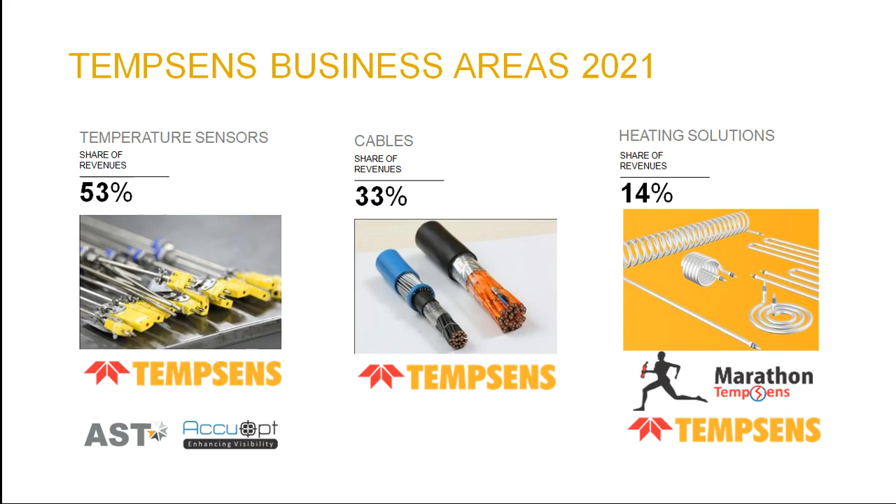This is Tempsens' business area, what we are doing. The three things we do are temperature sensors, around 53%, cable, around 33%, and heating solutions, around 14%.

Tempsens is headquartered in India, with plants also in Hennef, Germany and Jakarta, Indonesia. We serve around 6,500 customers in over 75 countries. We are growing at a fast pace of around 25% per annum, with sales over 180 crore, and we are planning to reach around 400 crore in 21-22. We have already filed 6 patents in 2018, and we file 5 patents every year.

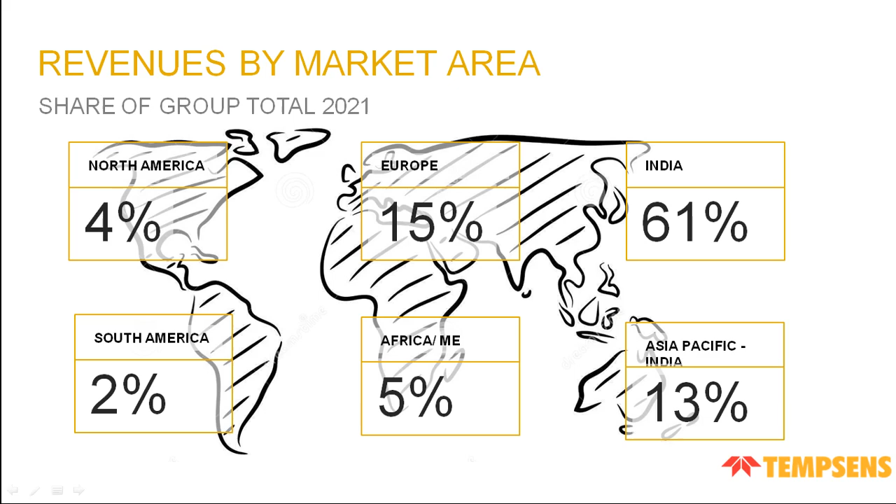This is the revenue by market. We have a strong base in India, Germany and Indonesia, and we are also expanding in other areas. We have planned to set up in the Middle East and also in the USA. So basically, this is Tempsens.

So who we are: our core is performance, and our products and services help our customers fulfill and even exceed their productivity and performance expectations. We are a close partner having long-term relationships with customers, employees, shareholders and vendors. What we do is provide solutions in the field of thermal and cable, offering industry-leading innovative solutions.

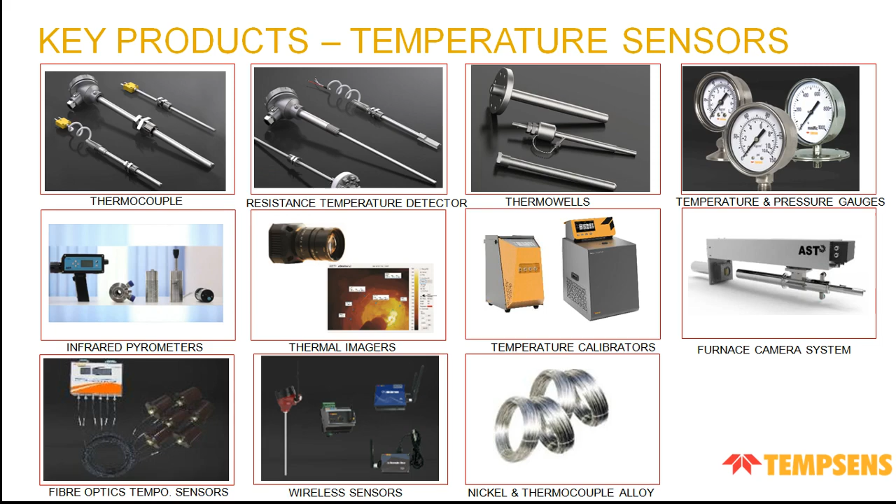These are our key products in temperature sensors: thermocouples, resistance temperature detectors (RTDs), thermowells, temperature and pressure gauges, infrared pyrometers, thermal imagers, temperature calibrators, furnace camera systems, fiber optic temperature sensors, wireless sensors, and nickel thermocouple alloy.

In cables, our key products are thermocouple and RTD cables, high temperature cables, special type cables, MI cables, metal sheathed and instrumentation signal cables, LV control and power cable up to 1.1 kV, lead wires and hookup wires.

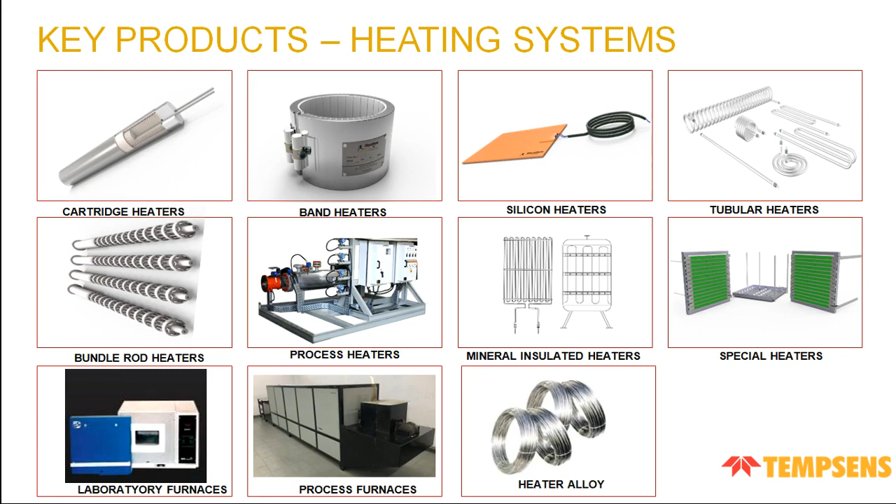In heating systems, our key products are cartridge heaters, band heaters, silicon rubber heaters, tubular heaters, bundle rod heaters, process heaters, mineral insulated heaters, special heaters, laboratory furnaces, process furnaces, and heater alloy.

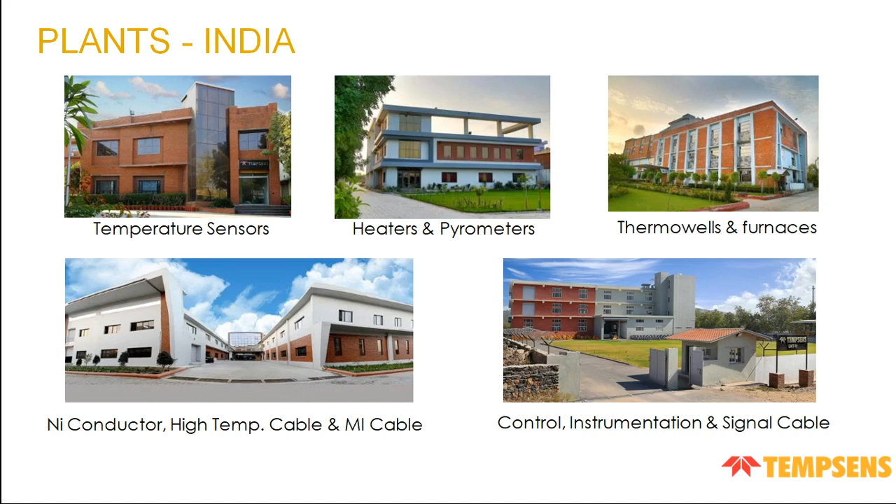This is our plant in India. We have a total of five Tempsens plants, located in Udaipur, where we are working. This is the location of the plants in India. These are our plants outside India: one is Tempsens GmbH in Hennef, Germany, and the other is PT Indonesia.

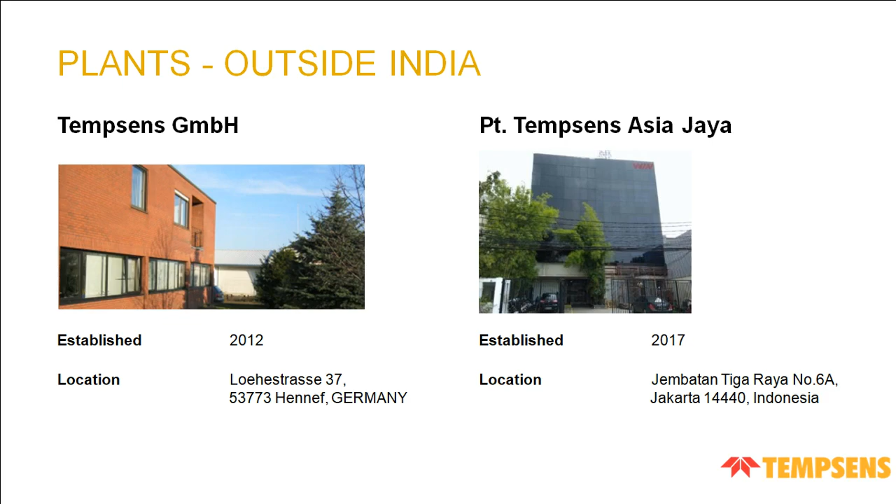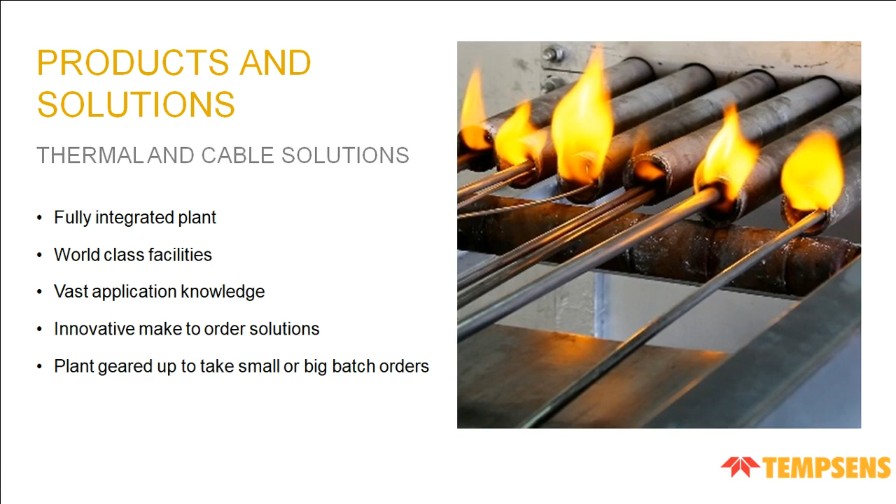Products and solutions: in thermal and cable solutions, we provide a completely fully integrated plant with world class facilities, vast application knowledge, and innovative make-to-order solutions, geared up for small or big orders. Tempsens is the only company in the world to melt its own alloy, make MI cables, and do final assembly of the thermocouple. Our facilities are world class, and we are invested for the future. The company has been investing heavily for the last 10 years and can be considered to have the best facility in its class.

Now we discuss our laboratory and industrial furnace solutions. This is our laboratory and industrial furnaces webinar. In laboratory furnaces, we have 4 standard products available: first is MF standard furnaces, up to 1200 degrees centigrade; then HTF high temperature lab furnaces, up to 1800 degrees centigrade, ranging from 1400 to 1800 degrees centigrade. Then in tubular furnaces, we have three different types: standard tubular furnaces in 3 zones, split tube furnaces (vertical and horizontal), and bottom loading furnaces.

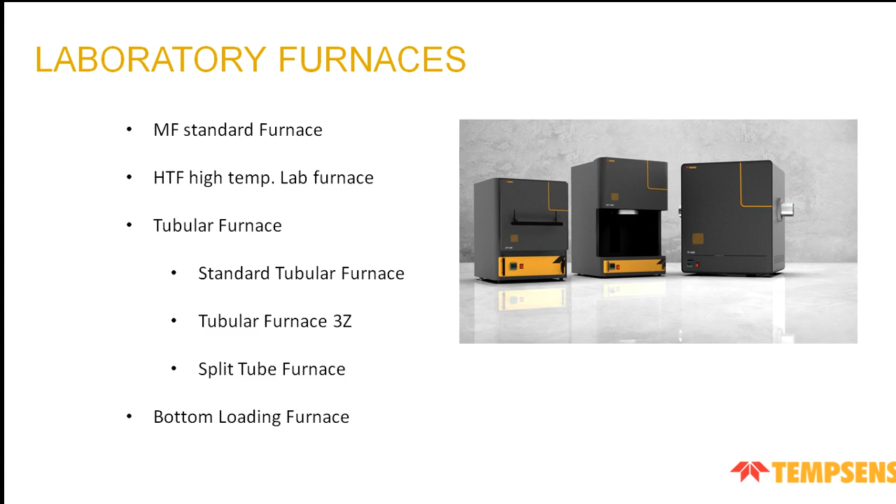So this is our MF standard model furnaces, up to 1200 degrees centigrade, a general purpose muffle furnace available in 4 sizes: MF 112, 312, 412 and 512. Each model has different volume and size because we are using the silicon carbide muffle in that.

Silicon carbide muffle has advantages over alumina muffle. It has better thermal shock resistance, and the heat loss in the silicon carbide muffle is also very less. The application can be general laboratory testing, annealing, ash determination, coal analysis, leaf carbonization and lime calcination. We have up to 1200 degrees centigrade in MF models.

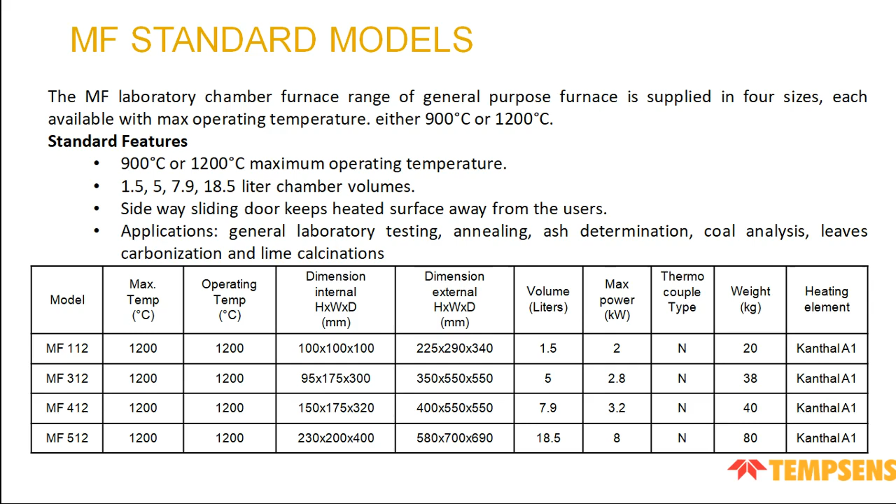This is our high temperature laboratory furnace models. These have a range of 1400 to 1800 degrees centigrade, available in 3 models: HTF 1400, HTF 1600 and HTF 1800. Size can be anything the customer requires, and we use high temperature ceramic fiber boards to ensure energy losses are very less. This can go up to 1800 degrees centigrade.

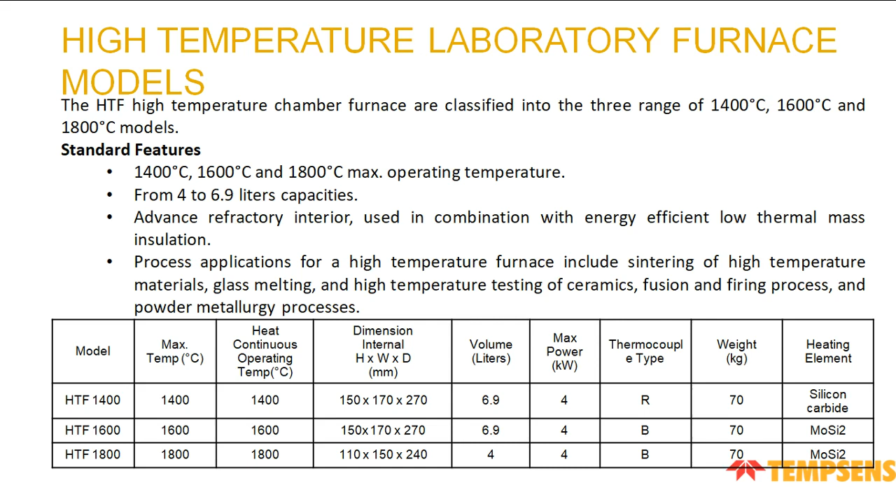The application of these furnaces can include sintering of high temperature material, glass melting, high temperature testing of ceramics, fusion and firing process, and powder metallurgical process.

This is our standard tubular furnace. It is used where we have to do heating in a vacuum or gas environment, which cannot be done in muffle or high temperature furnaces. These tubular furnaces can go up to 1700 degrees centigrade, using a quartz tube or alumina tube. Up to 1200 degrees we use a quartz tube, and above 1200 degrees we use an alumina tube.

When you have to do something in a vacuum or gas purging environment, we have the tubular furnace available, and you can put your material inside. The flanges are on both sides of the ceramic or quartz tube, and vacuum or gas purging can be done. These are available in 4 models: TF 1200, TF 1400, TF 1600 and TF 1700. The tube size can be customized as per customer requirement, and the hot zone can also be customized.

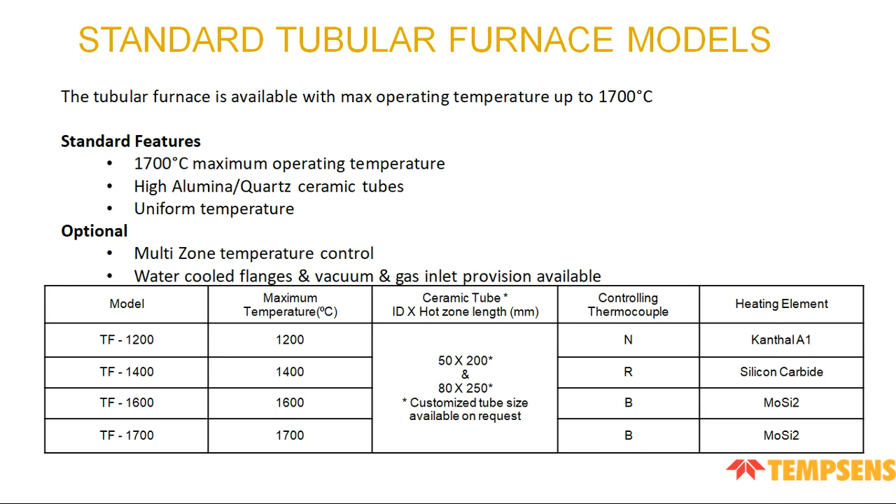This is the tubular furnace, 3 zone. When higher uniformity is required in heating of the material, this tubular 3-zone furnace is used. There are 3 zones with multi-zone controlling, each using an individual controller, and we can get uniformity of up to plus minus 1 degree centigrade. This can also be done in vacuum and gas environment as per customer requirement.

The application can be aging, annealing, brazing, calcination, catalyst research, chemical vapor deposition, CVD furnaces, degasing, drying, hardening, sintering, soldering, sublimation and synthesis, and tempering, etc.

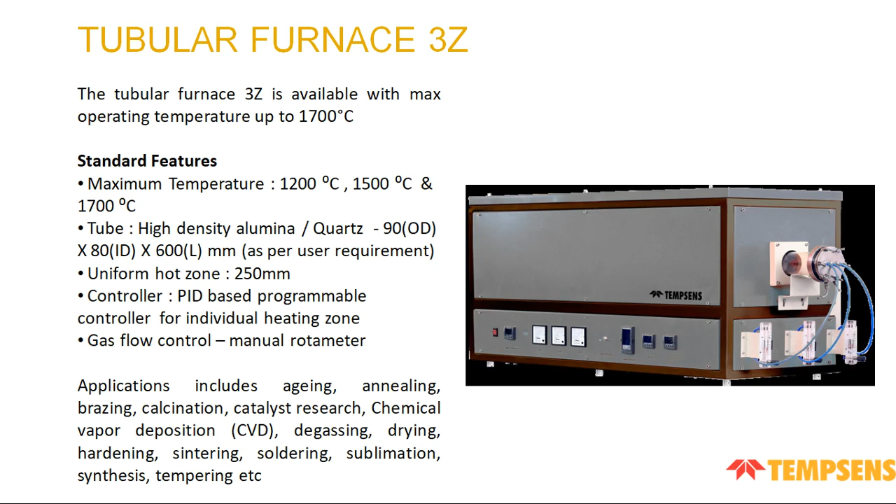Now this is our 4th standard model, the bottom loading furnace. These are used where you have to remove the material at very high temperature. In standard muffle furnaces, you cannot remove material at very high temperature. So we designed this special bottom loading type furnace, which can go up to 1800 degrees centigrade.

The material is put inside the chamber above the lift in the furnace, and a lifting mechanism is used to remove the material from the furnace. The bottom lifting arrangement uses a DC motor, which ensures smooth lifting at a speed of 3 to 4 mm per second. This is available in 3 models: BLF 1200, BLF 1500 and BLF 1800.

The application of these furnaces can be calcining, firing, sintering oxide, ceramic parts like alumina and zirconia, cement and glass industry, etc.

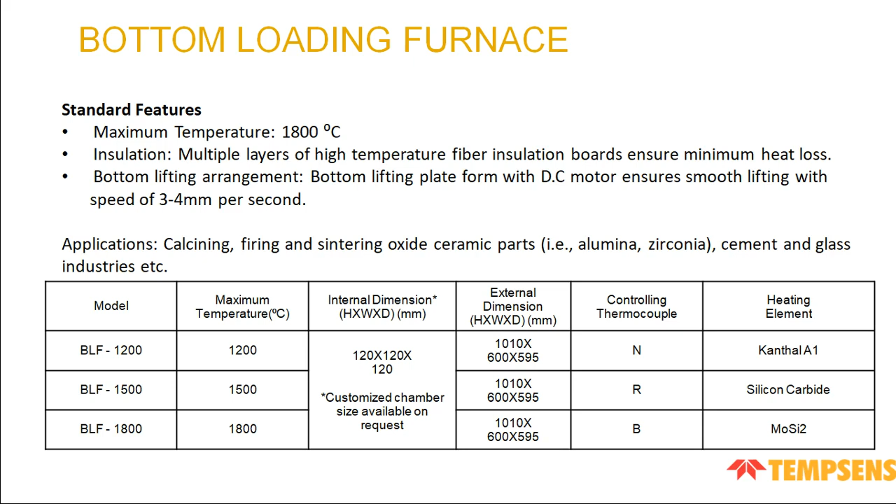Now we have finished our laboratory models. Now we will discuss our industrial furnaces. All these furnaces can be customized as per customer requirement.

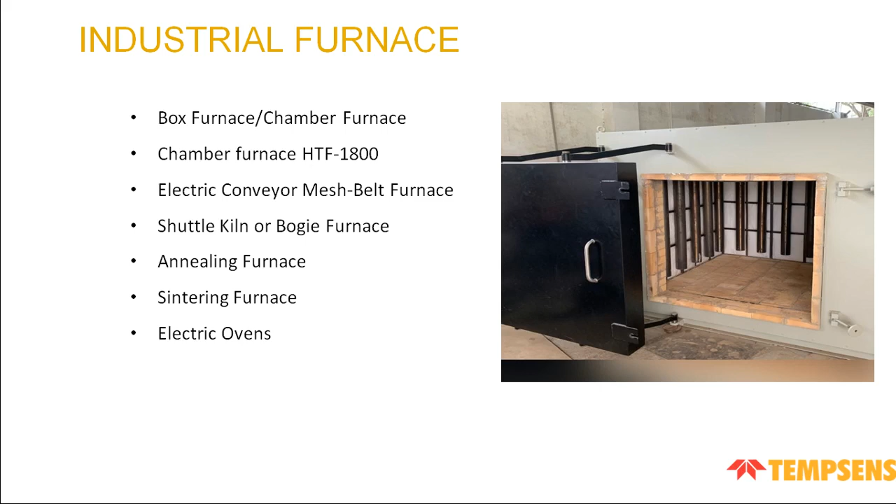First we will discuss box and chamber furnace. When the material is very big, like 1 meter by 1 meter by 1 meter, or 2 meter by 2 meter by 2 meter, and it needs to be heated at very high temperature, between 500 to 1200 degrees centigrade, we have the box furnace or chamber furnace available. Chamber dimensions can be as per customer requirement, and the temperature control can be multi-zone or single zone.

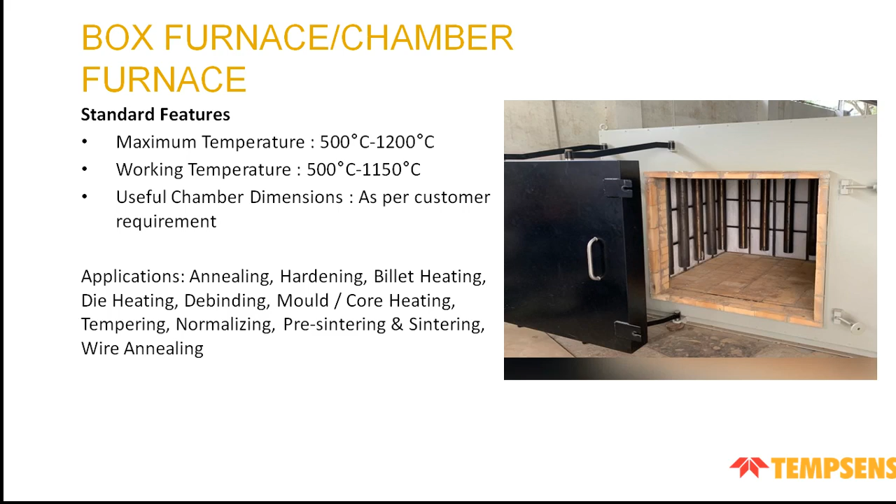As per customer requirement, we can do the controlling of the chamber furnace. The applications of these furnaces can be annealing, hardening, billet heating, die heating, debinding, mold core heating, tempering, normalizing, pre-sintering, sintering, and wire annealing.

So the earlier chamber furnace was only up to 1200 degrees centigrade. Now if the temperature requirement is more, we have chamber furnace up to 1800 degrees centigrade, which uses silicon carbide heating element or molybdenum disilicide heating element as per the requirement of the temperature. If it is up to 1400 degrees centigrade, we use silicon carbide heating element.

If it is up to 1800 degrees centigrade, we use molybdenum disilicide heating element. So these furnaces are capable of reaching higher temperatures. It consists of heating element of MoSi2 located on both sides of the heating chamber to assure good thermal uniformity. High temperature furnace insulation will be done from high temperature bricks.

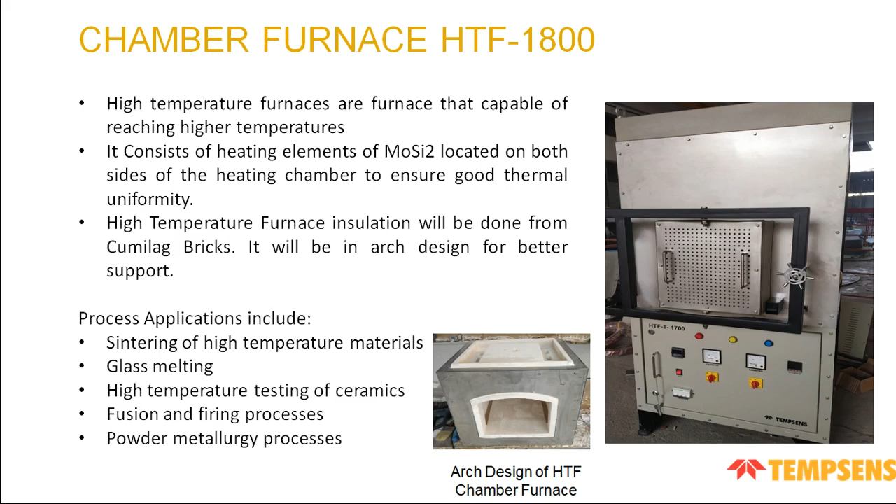It will be an arch designed for better support. And the process applications can include sintering of high temperature materials, glass melting, high temperature testing of ceramics, fusion and firing processes, powder metallurgical processes.

Now this is our special model, electric conveyor mesh belt furnace. Conveyor mesh belt furnaces are used for continuous heating of large quantities of material. This is a moving belt, and you place your material on the front side, and the belt will be continuously moving on the motor. The heating chamber will be a muffle of 1100-1200 degrees as per customer requirement, and material is kept at one end of the belt which passes through the furnace.

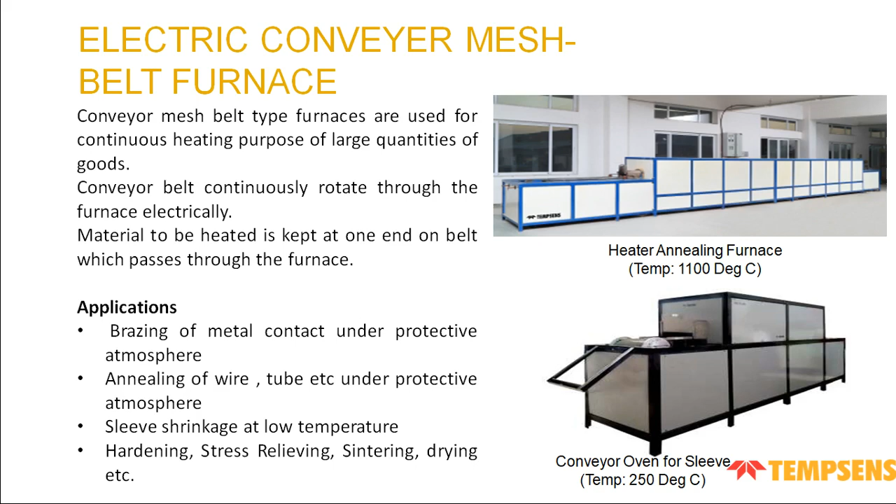This furnace is being used for brazing of metal contacts under protective atmosphere, annealing of wires, tubes, etc. under protective atmosphere, sleeve shrinkage at low temperature, hardening, stress relieving, sintering, drying, etc.

Now we also have shuttle kiln or bogie furnaces. Bogie furnaces are used where heat treatment of heavy goods is required. So if the material is very large and we cannot put it inside the furnace, the bogie can be moved inside and outside of the furnace easily with a motorized arrangement or by manual arrangement as per requirement.

Maximum temperature of the oven can be around 1200 degrees centigrade. In the bogie furnace, there is one shuttle inside the bottom which will move in and out of the inner chamber of the oven. Bottom side of the oven will have GT wheels. The bogie will be movable on rails, and bogie movement can be by motorized arrangement, pneumatic system, or manual. Guide rails will also be installed to facilitate the running in of the shuttle.

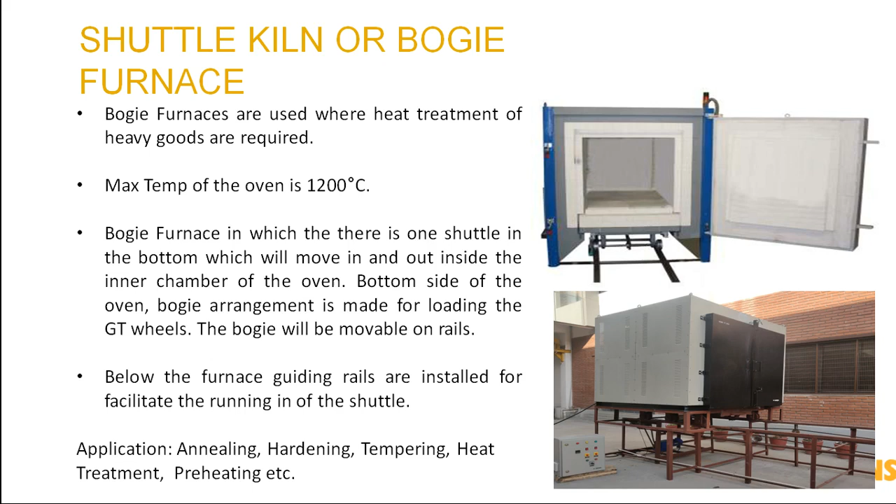And the application of this type of furnace can be annealing, hardening, tempering, heat treatment, preheating, etc.

Now this is our wire annealing furnace. When we have to anneal wires, copper wires or any wires at high temperature around 1100 degrees centigrade, this furnace is very useful. It has basically 4 zones of 200 mm width and 50 mm height, and 4000 mm is the total hot zone length of the furnace.

The muffle will be used inside this, made of ceramics, and there will be 4 pipes or 6 pipes as per customer requirement. We can customize this with 25 mm diameter pipes, and we can also increase or reduce the pipe diameter. The annealing atmosphere is cracked ammonia, and the feeding zone and cooling zone are also customizable as per customer requirement.

We can customize as per customer requirement, and the maximum temperature can be 1100 degrees centigrade. Multi-zone controlling can be done with microprocessor-based controls, and we can also provide a programmable controller. The heating element will be Kanthal A1, and there will also be provision of gas inlet and outlet ports.

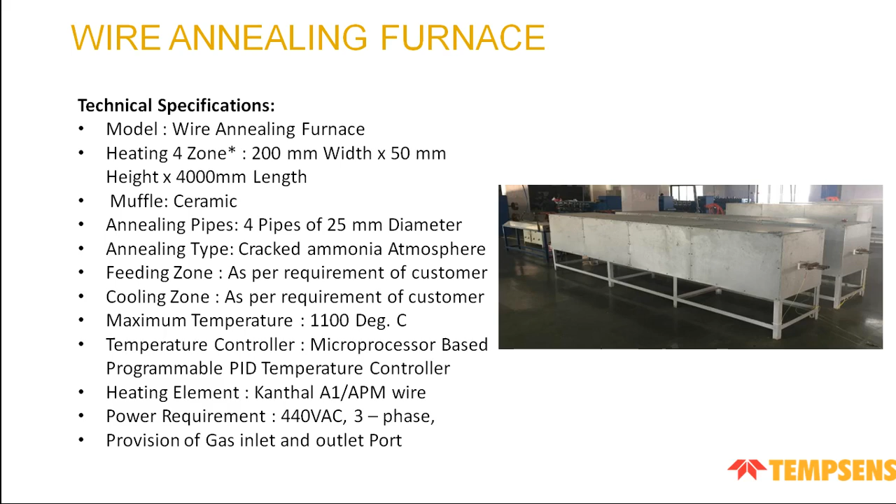This is the bigger furnace, for wire annealing. Basically this is used for tube annealing process. The heating can be 5 zones or 6 zones as per customer requirement.

The width of the heating zone will be 700 mm, the height can be 150 mm, and length can be 8000 mm. This can also be customized, and there can be 6 pipes of 50 mm diameter with cracked ammonia atmosphere.

So feeding is free, we can feed the material directly. On the opposite side, where the material is taken out after annealing, there will be 6 numbers of take-up units for pulling the tubes, using a motor arrangement to pull the material.

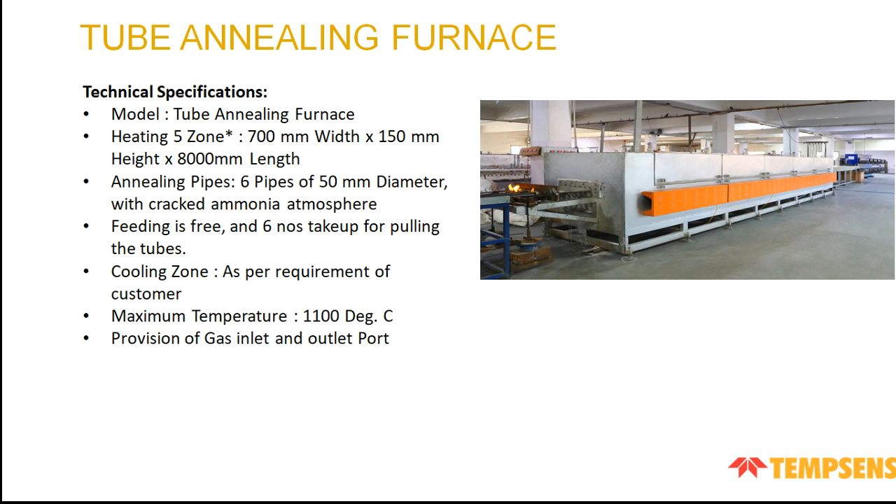Cooling zone can be customized as per customer requirement. Maximum temperature will be 1100 degrees centigrade, and this is also done in cracked ammonia atmosphere, so there will be a provision of gas inlet and outlet port as well.

This is used for sintering of ceramics at high temperature, maybe around 1750 degrees centigrade. For 1400 degrees centigrade we can use SiC heating element, and for higher temperature above 1400 degrees centigrade we use molybdenum disilicide heating element.

There can be multiple layers of high temperature ceramic fiber boards plus bricks arrangement used to avoid heat loss, and there will be a bottom lifting platform with a DC motor for smooth lifting of the material.

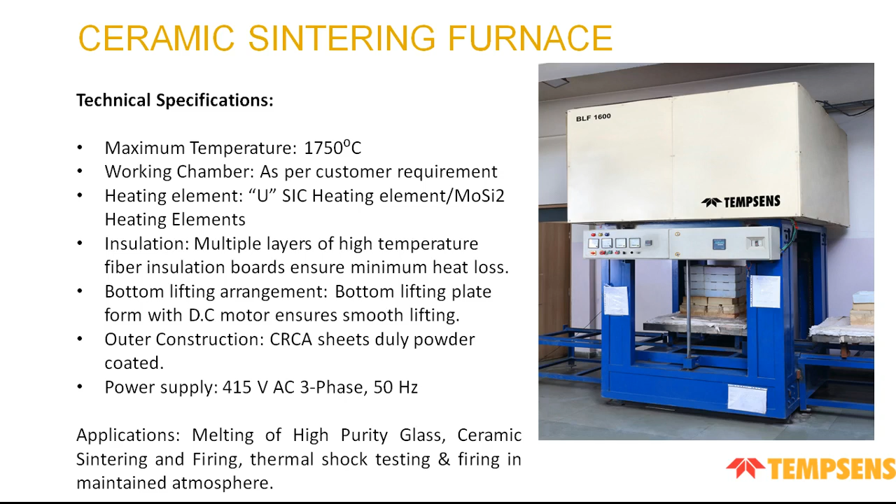The outer construction and inner construction can be of MS and SS, and the applications of this type of furnace can be melting of high purity glass, ceramic sintering and firing, thermal shock testing, firing in maintained atmosphere.

We also have different types of electric ovens available with us. These are all customized as per the customer requirement.

They are designed for low temperature thermal treatment such as drying, heating and thermal testing in airflow, and the capacity can be from 4 liters to 14,000 liters. Temperature uniformity is maintained throughout the chamber with forced air convection, like we can use an air circulation fan inside the oven to get better uniformity.

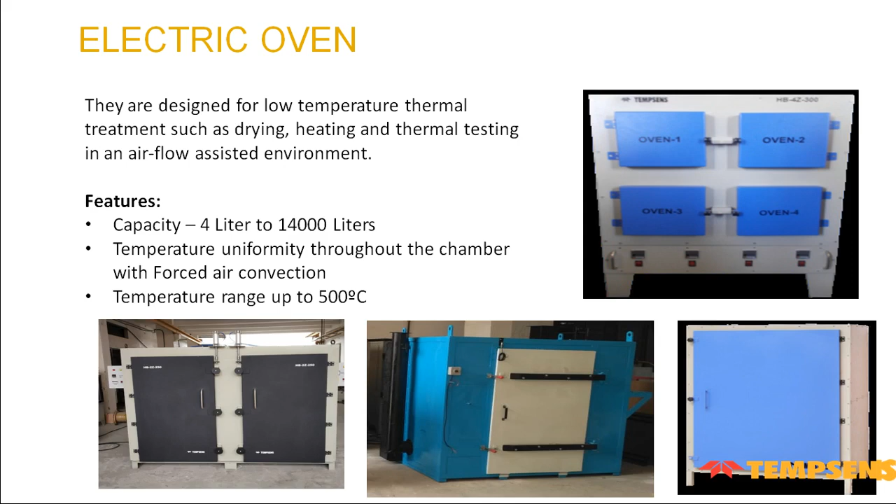This can be dual zone also, like this is a 2 pocket oven available, with a 4 pocket oven single zone, and temperature range will be up to 500 degrees centigrade.

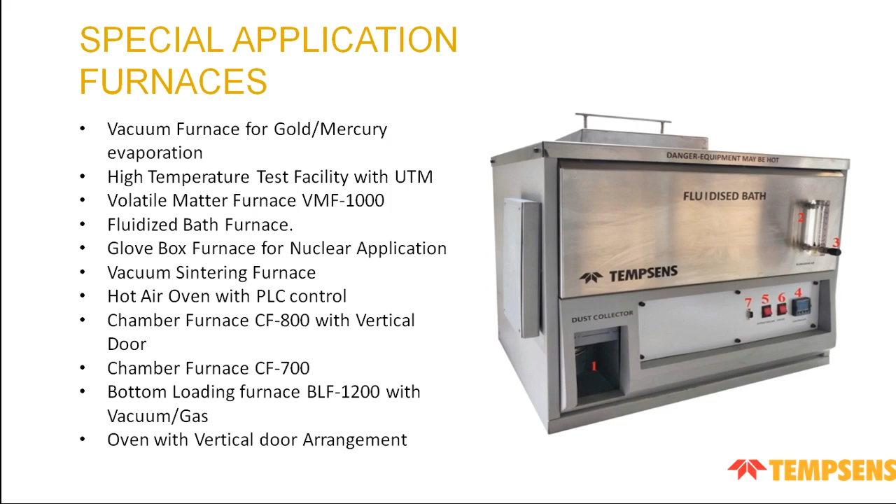Now we discuss special application furnaces which we have done for our different customers. These are basically designed as per customer requirement. So first is the vacuum furnace.

This is basically a vacuum furnace for gold mercury evaporation. So to get a pure form of gold, this furnace has been used. This vacuum furnace is specially designed for purification of gold, and mercury is removed from the pure gold at high temperature under vacuum atmosphere.

When the material is heated at 800 degrees centigrade, pure gold is heated, the mercury is evaporated in this furnace, and it gets collected at the bottom of the furnace.

The inner chamber is of SS and the outer chamber is of MS with dish end design. Kanthal heating elements are embedded in refractory groove tiles, and flanges are provided for vacuum inside the furnace. The vacuum of the furnace is around 100 millibar, and the size is 400 by 400 by 800.

This type of furnace can be used in heat treatment of alloys, debinding, carburizing, brazing, gold annealing, etc.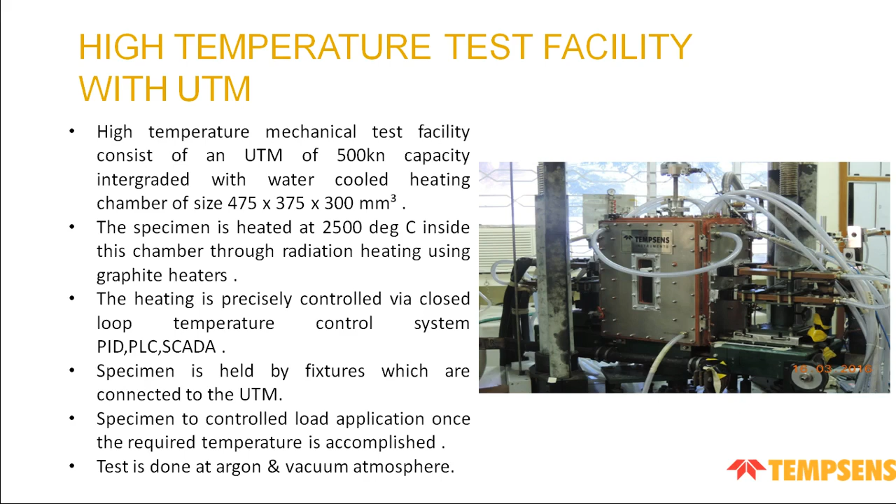This is basically the volatile matter furnace VMF 1000 degree for determining volatile matter in coal. The chamber dimension of the furnace is 50 mm by 100 mm, with 50 mm being the diameter and 100 mm the height.

Heat up time to continuous operating temperature is 950 degree plus minus 20 degree for 20 minutes, and the furnace is designed around the requirement of the standard ASTM D3175-11 for testing of volatile matter of coal. It is a top loading furnace with access to the chamber by a hinge lid.

Volatile matter is arrived at by the loss in mass excluding moisture when a coal sample is heated. The volatile matter discharge is typically hydrocarbon and some sulfur contents.

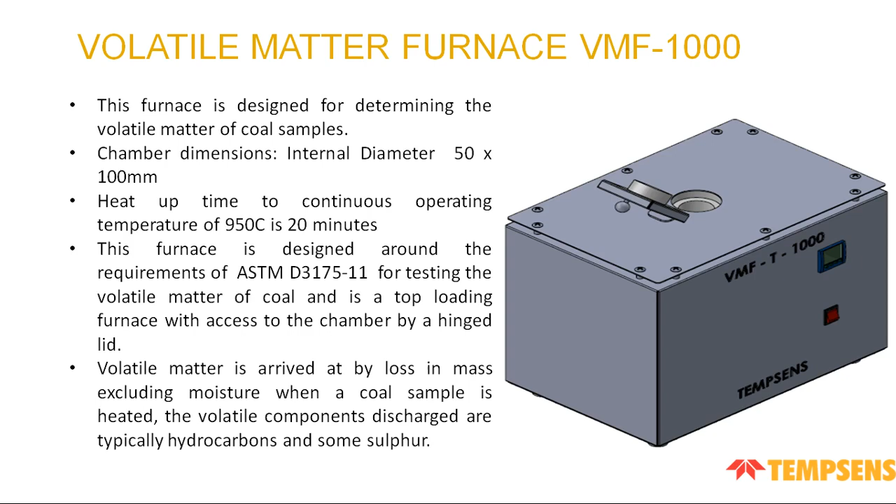This is basically a fluidized bath furnace which has a temperature range of 50 to 600 degrees centigrade. The bath furnace is capable of accurately maintaining temperature uniformity and stability at constant temperature, and alumina powder is used as a medium in this furnace. The working volume is 150 mm diameter and 490 mm length, and it is used in thermal testing of sensitive components, example semiconductor devices, wire products, delicate transducers, and for constant temperature environment for chemical reactions.

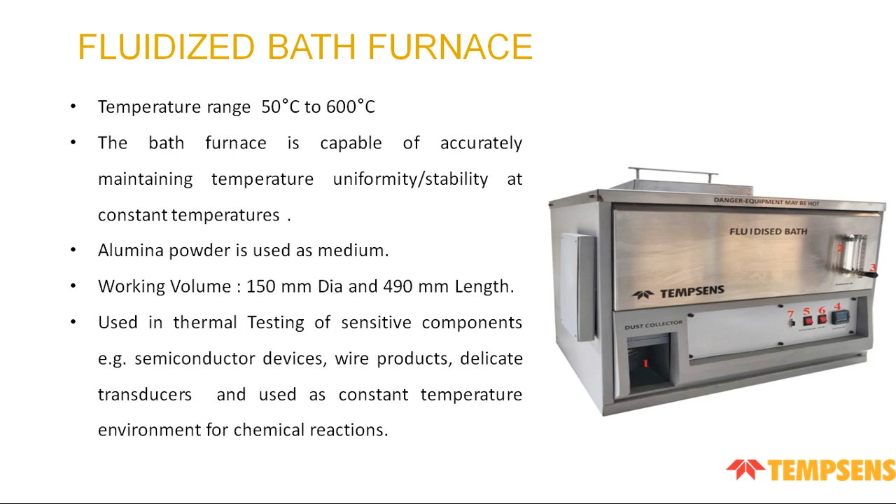Basically this type of furnace is used in a glove box for nuclear applications. So this furnace is installed inside a glove box, and the reduction furnace will work in reduction environment and the oxidation furnace will work in oxidizing environment, and replacement of heater and insulation relining will be possible inside the furnace in the glove box.

This will be a front loading type furnace, and the furnace door will be operated by a synchronous motor with speed reduction gear assembly. The furnace operating temperature will be 1700 degrees centigrade with molybdenum heating elements within 93% nitrogen and 7% hydrogen mixed gas environment.

Oxidation furnace operating temperature will be 1700 degrees centigrade with molybdenum disilicide heating elements in air, and the inside pressure will be 100 millibar for this furnace.

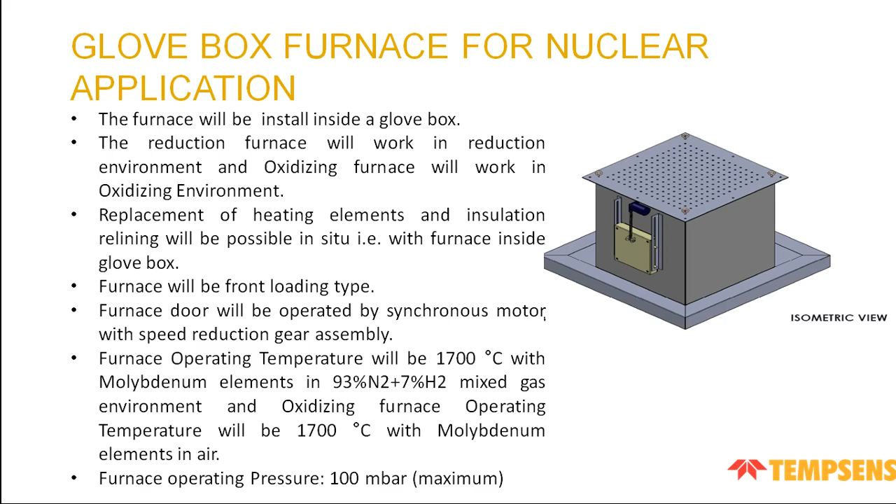This is basically a vacuum sintering furnace. So when a sample needs heat treatment at high temperature with vacuum, this type of furnace has been designed. The vacuum sintering furnace is used for processing material at very high vacuum, maybe around 10 to minus 4 millibar, and the vacuum system is used to achieve the vacuum inside the furnace.

The vacuum system comprises a mechanical rotary pump and diffusion pump, and the material is heated at 1000 degrees centigrade with continuous vacuum system. The maximum temperature is 1000 degrees centigrade, and a water chiller unit is also supplied with the system for cooling of the door gasket.

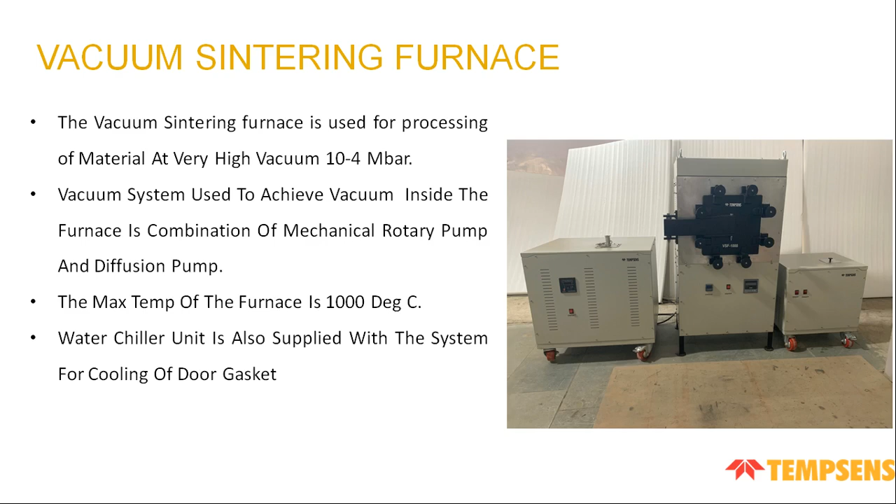This is the bigger, same furnace with a higher temperature range. This furnace has a temperature range up to 1700 degrees centigrade, and the vacuum achievement in this furnace is 10 to minus 3 millibar. This high temperature vacuum furnace is used for sintering silicon nitride material. The maximum temperature of the furnace is 1700 degrees centigrade.

The furnace consists of an inner vacuum chamber. The chamber has high temperature ceramic fiber board insulation, and molybdenum disilicide heating elements are used to achieve the desired temperature. The vacuum system consists of a mechanical rotary pump with a backing roots pump.

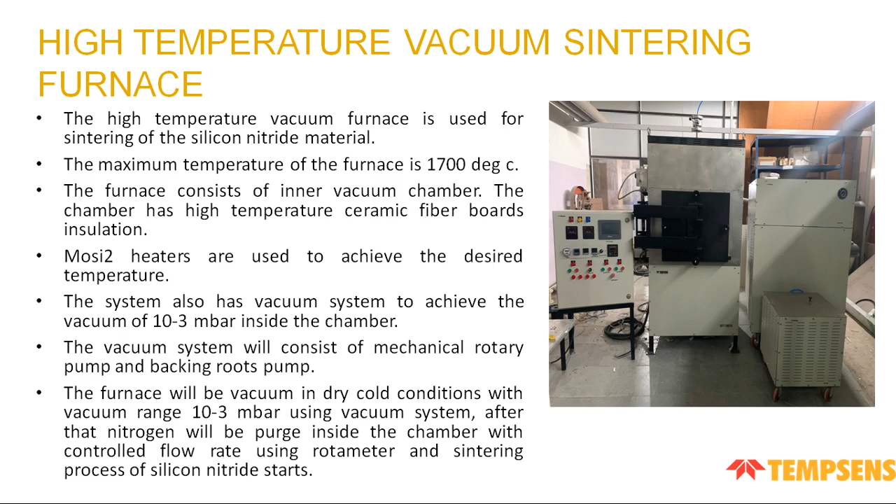The furnace is vacuumed in dry cold condition with a vacuum range of 10 to minus 3 millibar using the vacuum system. After that, nitrogen is purged inside the furnace chamber with controlled flow rate using a rotameter, and the sintering procedure of silicon nitride starts.

These are some more special application furnaces we have made for our different customers. First is a hot air oven with PLC control. This is basically a 400 degree centigrade oven which has complete PLC control. 6 thermocouples are used as input, given to the PLC, and after averaging it is controlled. So it is a completely PLC controlled system.

And one more chamber furnace: this is a 1.5 meter by 1.5 meter by 1.5 meter furnace with vertical door arrangement, with a working temperature of around 800 degrees.

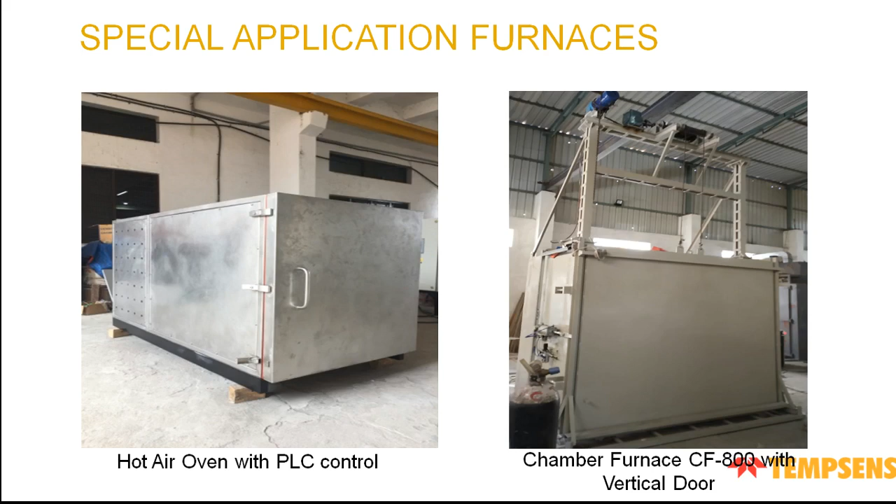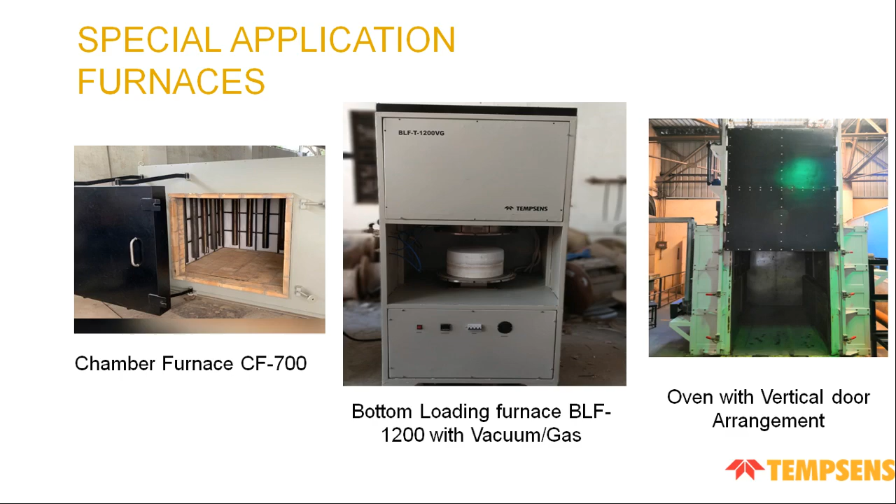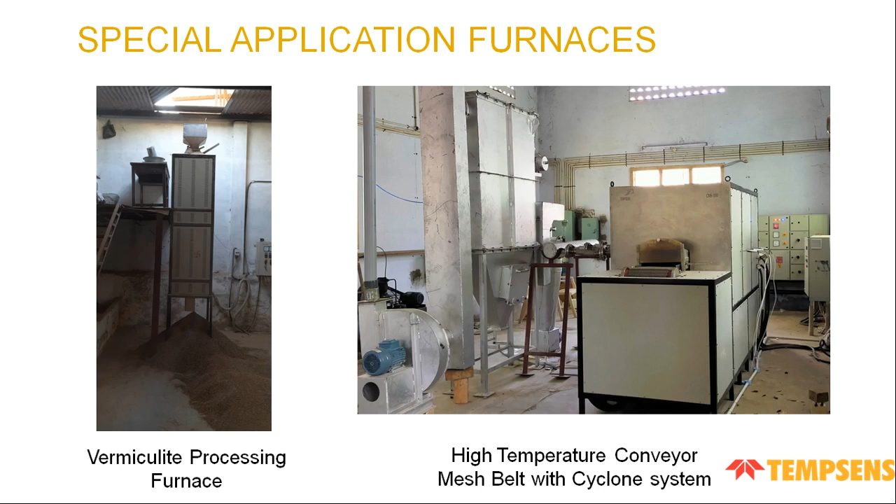So these are some special application furnaces available with us. We can also provide different types of furnaces.